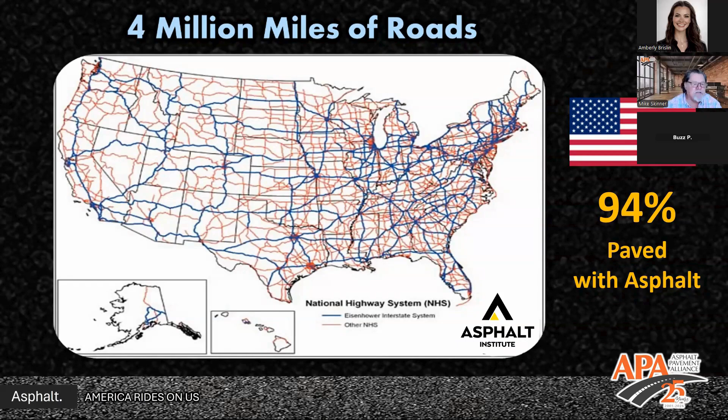Let's take a look at a little bit of history as it relates to our market share as far as the material side. Using data shared with us from the Asphalt Institute, in 2001 there were 150 operable refineries across the United States - 48 of those 150 produced asphalt. Fast forward two decades to 2024, and that number has dropped to 132 refineries, where only 43 of them are now producing asphalt. So we've seen a drop of about 12% in the actual supply side ability, but production has actually increased because of changes in refining technology.

So even though the number of refineries has decreased, production and output has increased. How much has it increased? We look at their next slide with where they track it. This is not asphalt tonnage - this was asphalt liquid binder tonnage.

If we just focus on the green line, which is the liquid asphalt used in paving, you can see the heyday over the last two decades was in the early 2000s, over 30 million tons of liquid binder, then a decrease in 2008 with the recession. The low point was in 2011, where the industry was down to just 14.6 million tons of liquid binder. And then we've seen a slow, steady increase to where we are today. In the last number reported in 2024, a year and a half ago, we are knocking on the door at just about 21 million tons of liquid binder, which is another metric we can use to measure market share, the growth and sustainability of our industry.

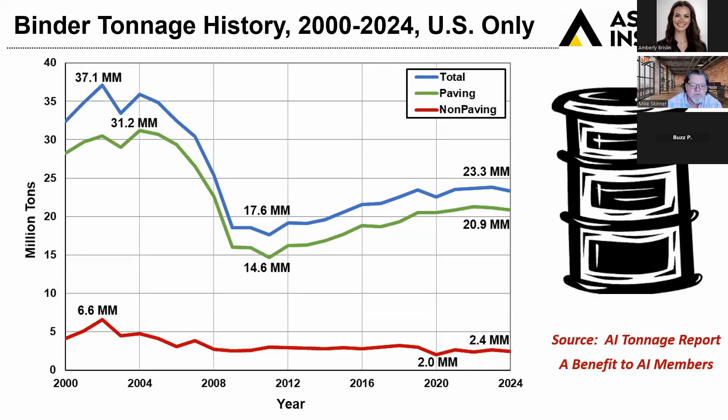We can put it down into a couple of different buckets, a couple of streamlined answers. But initial cost of construction is one of the key reasons why our industry dominates road construction. I'll give some examples about that in a minute.

The new emphasis our industry is putting on streamlining specifications and making them without sacrificing quality, more user-friendly and more flexible for producers—this is in the realm of balanced mix design. We'll talk about that in a few minutes.

Materials innovation, this is a big one. We'll spend the back half of the presentation talking about new technologies that can help solve some of the problems I'm going to highlight here in a few minutes.

And then the concrete maintenance performance has been well documented and researched. Out of the National Center for Asphalt Technology in Auburn, Alabama, they have documented the inflection point occurs at about year 25, meaning the ROI on maintenance, where it used to be promoted at about 40 years, is actually about 25 years based on the data published by NCAT.

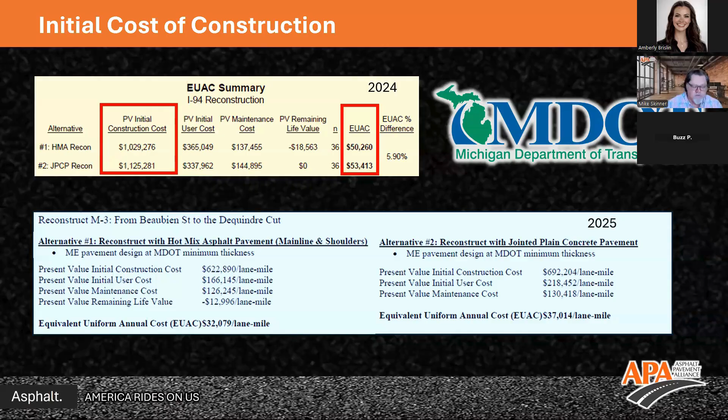Here are two examples from Michigan, where they do a lot of life cycle cost analysis for their projects. Looking at the I-94 reconstruction project, they pull those future costs back to present day value. The numbers aren't terribly important - I just want you to look at the difference between the asphalt reconstruction option and the concrete reconstruction option: a lower initial cost of construction. The EUAC, or equivalent uniform annual cost, also reflects this lower cost of construction.

Take a look at a second project in Michigan. Alternative one was to reconstruct with asphalt, alternative two, reconstruct with concrete. Again, the numbers aren't terribly important, just look at the difference. This project's costs were broken down per lane mile, and it was about $623,000 per lane mile for the asphalt option versus almost $693,000 initial cost of construction for the concrete option.

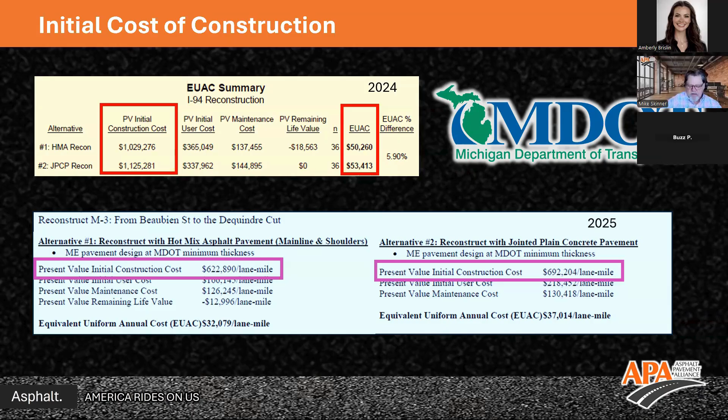When you look at this across the United States, regardless of what local agency - city, county, municipality, Department of Transportation - you'll find this trend across the country that the asphalt option is almost always a lower initial cost of construction. So that's helpful. But the funding and budget that becomes available is really what's driving the success or lack of success of these programs. And I love this quote from Nye.

He is the regional materials engineer for the North Central Division for the Arizona Department of Transportation. Nye is based in Flagstaff, up at 8,000 feet. I was talking to him last year, and he said, 'Mike, listen, in Arizona at the Department of Transportation, we're not in pavement preservation mode, we're in pavement life support mode.' Those of you in the Arizona market probably would agree with that - the roads in Arizona are rough, and there's a lot of reasons for that, but we won't get into it. The concept can apply probably to the state that you're in.

It's not in preservation - and I don't mean preservation in terms of surface treatments, those type of things. I mean preservation in general, maintaining your network. It's in life support. Why are things so bad across the country?

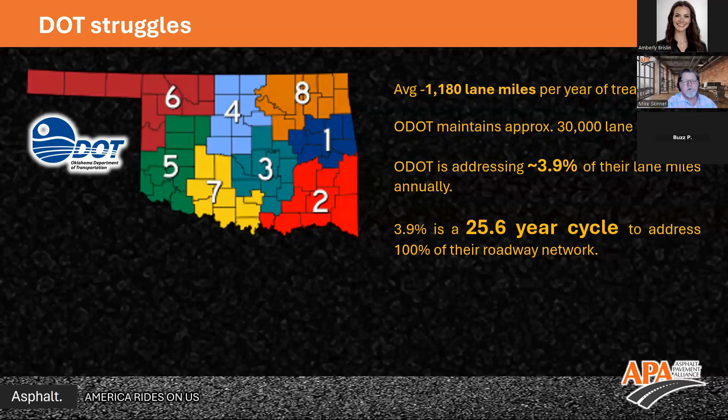I'll give you a couple of examples. Here's an example in Oklahoma, where they have 8 different districts for the DOT across the state, and they maintain about 30,000 lane miles. But based on their current funding level, they're only treating about 1,200 lane miles per year out of those 30,000 - not even hitting about 4% of their network each year. So to cycle through their entire network and hit 100% of the road, it's a 26-year cycle.

This is a perfect example where their only viable path for their DOT moving forward, with the limited budget they currently have, is to minimize their costs and maximize their return on investment - their service level, their quality, and the performance of what they are doing and spending money on.

Now, Oklahoma is not the only DOT in this condition - we could point to examples for all 50 states. I'm just going to draw attention to a couple more. This happens to be Indiana.

Program delivery might be defined in number of tons of asphalt placed every year, or a number of lane miles addressed, or an area or square feet of preservation treatments placed. But all of those numbers come down with minimal or stagnant flat funding.

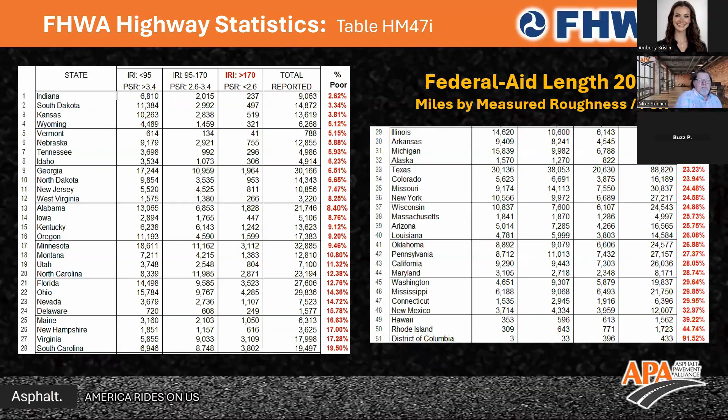What else is impacting program delivery? If you look at program distribution - this data comes from Pennsylvania - going back just a couple of years, to 2022, the percentage of their funding spent on highways was 73%. By 2026, depending on whether you include a bridge project or not, you're down to 45 or 60%. The numbers we're seeing in the other direction are increasing for bridges. This is something we're seeing across the country.

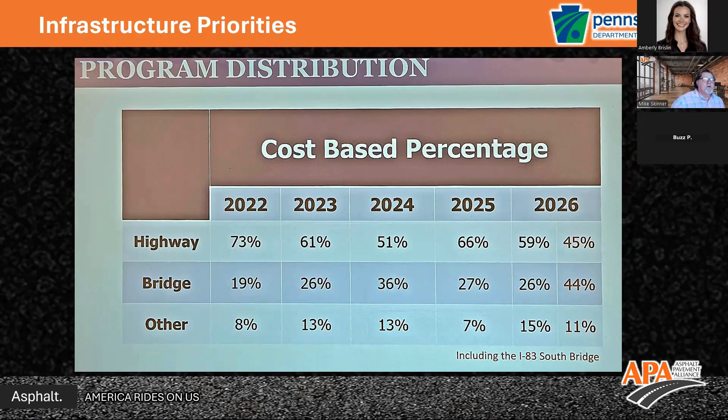Why is it? Well, our interstate highway system is celebrating its 70th anniversary this year. That also means we have an aging infrastructure, and our bridges are experiencing 70 years worth of use. So we're seeing larger and larger infrastructure programs having to include these massive bridge programs, which is redirecting a portion of funds from highways to bridges. We also saw that distribution with the IIJA money that came out a couple of years ago. So program distribution is having a significant impact on highway dollars in your state.

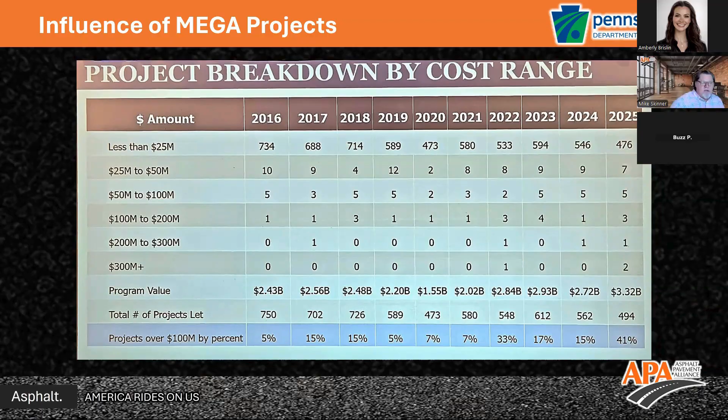While we're still spending money on the highways, it's pulling funds away from distributing them across the state, focusing them in large scale projects, which is having an impact on overall performance across the states.

So I've spent the last 15 minutes talking about impacts to program delivery and problems. It's great to get an understanding of why some of these things are happening, but I don't want to leave it there. So for the next 20 minutes, I'm going to talk about some solutions that we're seeing across the country. Different states are adopting these different solutions, but how do we move forward?

Innovation isn't down the road, it starts today. So I'm going to go back to my statement: progress, not perfection. So what I might be sharing with you today, hopefully there's a takeaway, one, two, or three things here that you can take back as a designer or an agency and say, you know what, I heard some great stuff. Let's move down this road.

Progress, not perfection. So let's talk about expanding the use of RAP, or recycled asphalt. This is Duval Asphalt down in Jacksonville, Florida, and they serve the northern Florida market. Beautiful photograph there, beautiful plant that they have down there. But what I want to draw your attention to is their use of RAP.

Now, RAP varies across the country — RAP usage, RAP availability, RAP quality. So there's a lot that goes into this. This is not a silver bullet, but there's a lot of testing that's required to make sure we're not impacting quality, maintaining quality.

But what I do want to draw your attention to here is their standard mix designs are running 40% RAP there in the Jacksonville market. And then what they identify as their high RAP mixes are 65% RAP. Now, when we start to talk RAP at those numbers, those are some very specialized mix designs, and they require quite a bit of attention to quality and control.

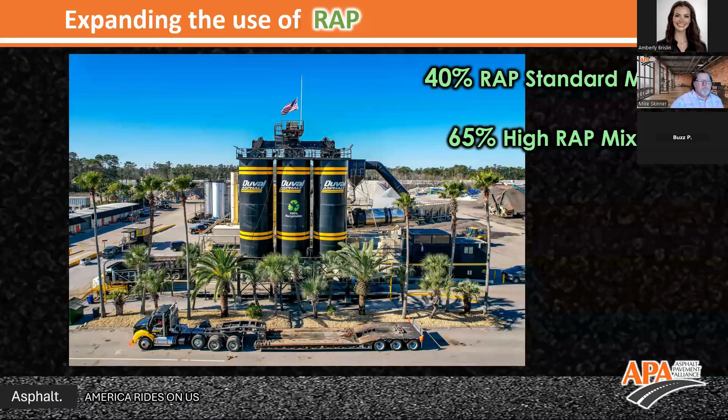Materials and design innovation — I mentioned high mod, or highly modified asphalt. This isn't a material, this is a design philosophy that increases the amount of liquid binder that you're putting in the mix, the quality of the binder and the amount of the binder, and then thick lift paving.

So we can do a whole presentation on this, and Buzz will be doing a presentation on this during our next webinar that Amberly briefly mentioned. But I wanted to give you a two-slide snapshot of what that looks like.

So here are four standard binders that have been in use across Utah at their DOT. The high mod is the one that's on the far right, the PG 76 minus 34. And so Howard Anderson, who's the state materials engineer there in Utah, did a quick little calculation and calculated a stack of 11 dimes is the equivalent of about 1 kilopascal.

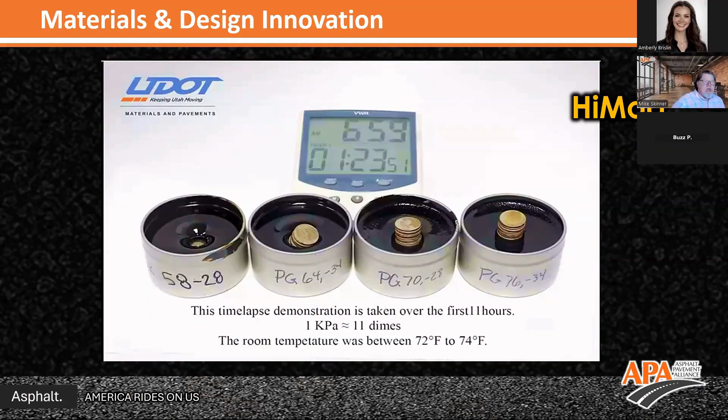So they set the stack of 11 dimes on the surface of the binder and set a stopwatch, and then let it run to see what the stiffness looks like. So this is a great visual of what that stiffness looks like.

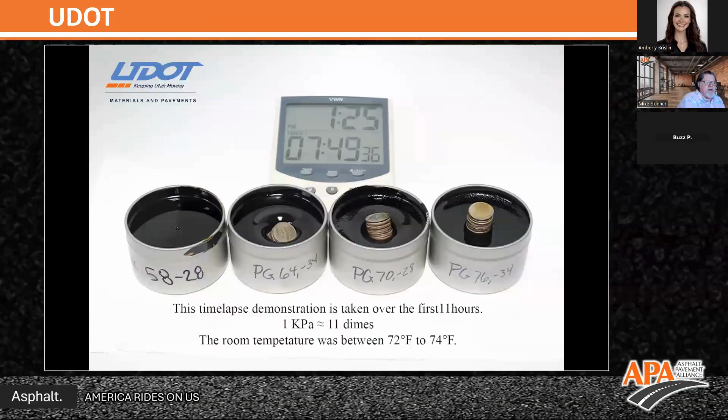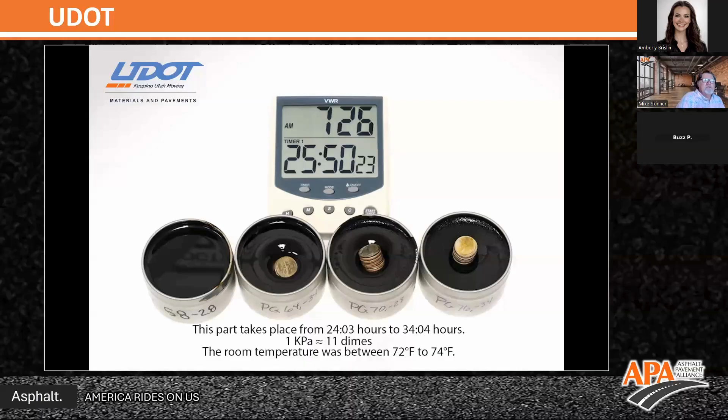Now the camera here is accelerated because you can see the time running through that. But the 58-28, which is the softer binder — we always know that is the softer, more flexible binder — the dimes have completely disappeared. And then the high mod, here we are a day later, 24 hours later, high mod binder, the 76 minus 34 that's used in that material, is showing the stiffness. What's going on here is that binder has a higher percentage of polymer than a traditional polymer mix. That's the easiest way to think about this. And those polymers, because it's at a higher level, really start to dictate the performance of the liquid binder.

The other test that shows the success of these high mod binders is the elastic recovery and tensile strength test.

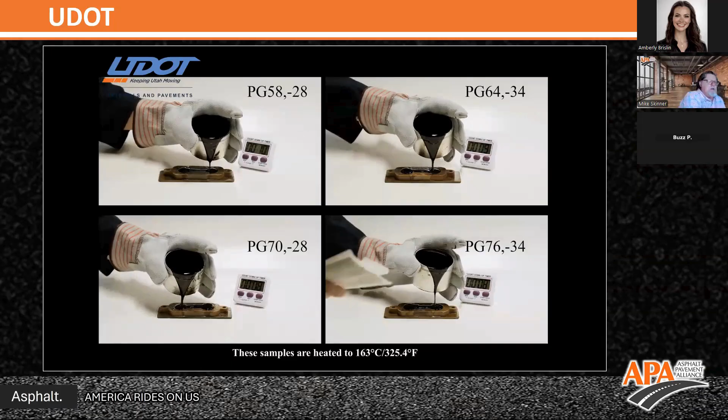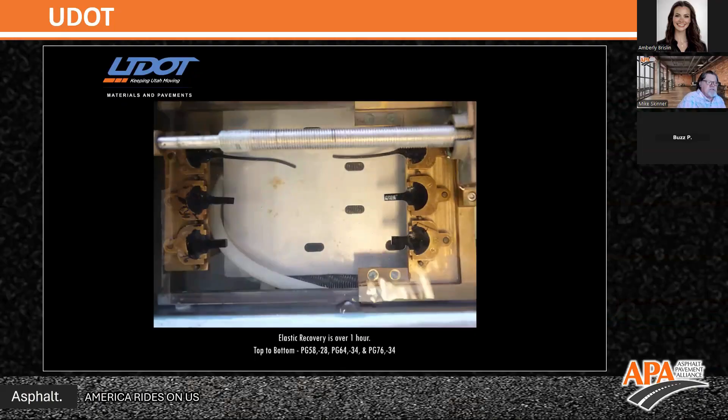Here's elastic recovery. We take this binder, pour it in the mold, put it in a water bath, and warm the samples up. This is a sped-up photograph movie, but we slowly pull them, then cut them with a pair of scissors, and measure that elastic recovery - how much does it snap back? That top sample is the 58 minus 28, and you can see it didn't pull back as much as the modified binders, meaning they have more flexibility.

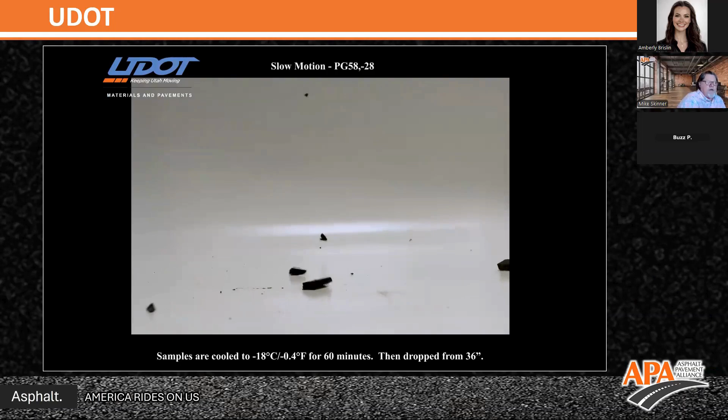The last test Howard did was take the samples, freeze them, and drop them from a height of about 3 feet to measure their flexibility. Interestingly, the 58 minus 28, being the softest binder, shattered - that was the first one. Here's the last sample, the 76 minus 34, dropped and slowed down in slow-mo - you can actually see it flex, and it doesn't shatter.

That's the concept of the material, the liquid binder they're using in Utah for their high mod projects.

They're also paving in thick lifts, contrary to what we've seen for a long time in the history of your career - paving in 6 to 8 inch lifts, but doing it in one pass. Your concern would be, are they able to achieve density compaction in that? Yes, because of the volume of binder in the mixes, typically 6% and higher as opposed to 5%, so they're putting about 20% more mix or liquid in there. They're using a higher quality binder and getting incredible performance for elastic recovery and compaction.

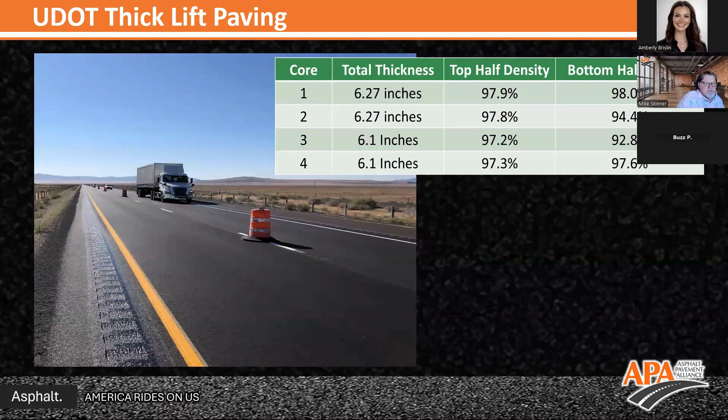So here is their Roads of Tomorrow - this is the cover of the magazine they published in Utah, talking about the implementation of high mod in Utah.

Their target density is 96%, and they've met that in 45 of the 50 projects they've done. Their pavements with high mod are more rut resistant than our previous Superpave mixes. The high mod binder allows higher binder contents by about 20%, and RAP is allowed in the surface course of these high mod mixes.

They're using regular dense graded aggregates, not gap graded aggregates like would be required in an OGFC or an SMA. That helps control costs when you don't have to do as much crushing and stockpile management with gap graded mixes.

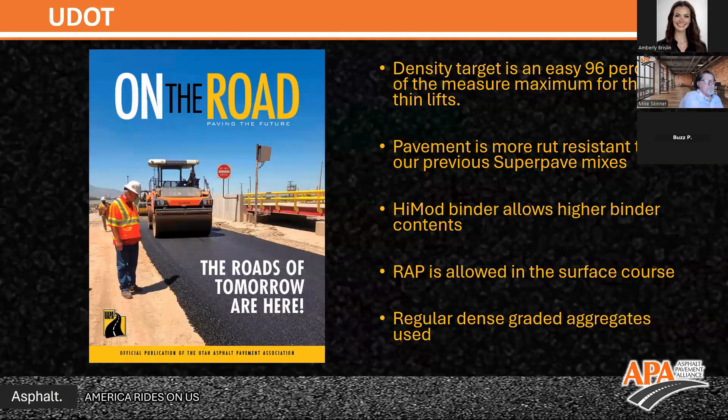Moving on to some other tools and resources that are available for you in the industry right now.

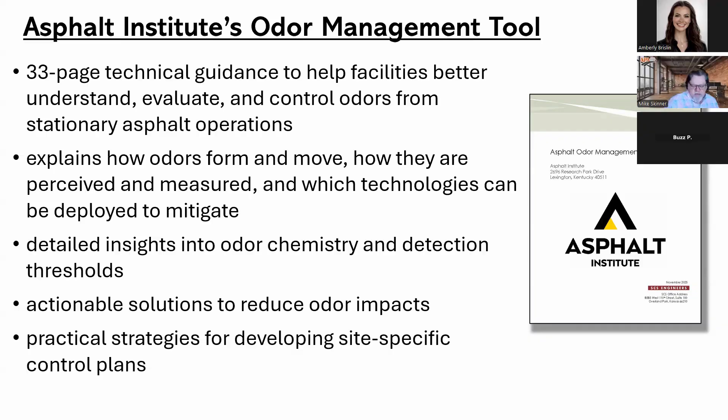The Asphalt Institute has recently issued their odor management tool - a 33-page technical document you can download off their website right now. It explains how odors are formed, how they're perceived, how they're measured, gives details and insights into the chemistry, detection thresholds, and actionable solutions to reduce odor impacts. If you're on the production or industry side, this is a wonderful tool. They've also got pre-recorded webinars, a three-part webinar program specifically about this odor management tool. It's an excellent resource if you're looking for impacts on odor management.

Another excellent resource I'd draw your attention to comes from NCAT, the National Center for Asphalt Technology, and some of their research as it relates to pavement design. Pavement design structural coefficients - the strength parameter assigned to the mixes as a variable - has the single greatest impact of all design variables.

So what we're looking at here is the initial construction of the test track in 2000. It was 24 inches of hot mix - a sea of asphalt, because this was the very first iteration. It was built to be perpetual, so they could control the distresses they wanted to control without other impacts. We've since learned that 24 inches far exceeds what's needed, and that perpetual number is much less, depending on where you are in the country and what kind of materials you have.

I'd draw your attention to NCAT if you're doing design work in engineering, to make sure you're using and have justification for using these higher structural coefficients. It's well documented - the Alabama Department of Transportation has been using a recalibrated structural coefficient since 2009. Dr. David Timm, one of the lead investigators and authors of this report, puts it well: Alabama has moved past the risk window. They've been using these structural coefficients since 2009 - if it was going to fail, research would have shown it, but it didn't. If it was going to fail, it would have happened already. I love that concept - they've already moved past the risk window.

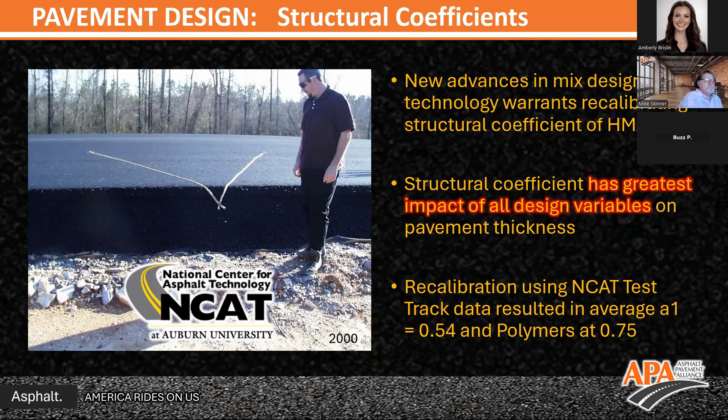As we wrap up our presentation, I'll share a couple of examples of sustainability.

Some of you across the country and states, this is very important to you, and it's a key component of your industry right now. Other states are not in that sector as far as environmental product declarations, and I'll talk about that in a minute.

But allowing alternatives to hydrated lime can make a significant impact on your environmental sustainability footprint. Hydrated lime is added to a mix as an anti-strip additive to keep the liquid binder adhering to the aggregate. But there are other alternatives in the form of liquid anti-strip or chemicals that can be added at the plant during production. Some states still do not allow liquid anti-strip, which can also have additional properties as compactive aids, warm mix additives, etc. They can serve a lot of purposes.

So we're not suggesting that you abandon hydrated lime, but maybe it's an 'and' application, not an 'or.' If you're not allowing for the application of liquid anti-strip, that's something you might consider.

Environmental product declarations: the National Asphalt Pavement Association is leading the way with their development of the Emerald Eco Label tool. You can see highlighted some of the states that are well along that route, that have implemented low carbon transportation standards or environmental product declarations. We don't see it across the country, but there are some key markets moving forward. Colorado is one of them, where I happen to live right now.

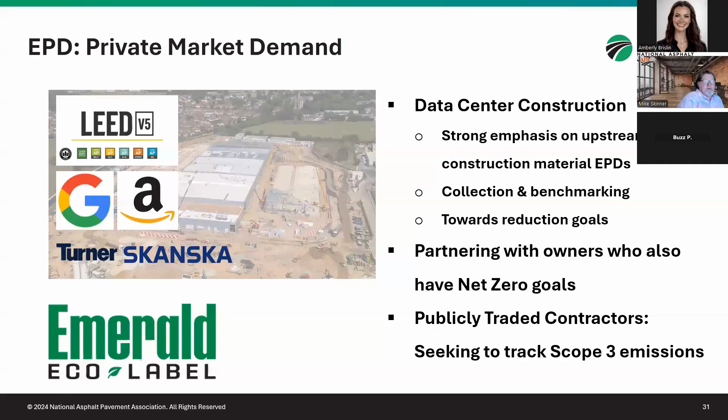Now, if you're in one of those states that doesn't have environmental product declarations, you might say this doesn't apply to us. I'd say be careful, because in the commercial market we're also seeing this, and NAPA's doing a great job engaging with industry on the commercial and private market. We're seeing large companies like Amazon and Google, and large civil construction companies like Turner and Skanska, building data centers across the country that have requirements for environmental product declarations as part of their bidding and procurement. So even though your DOT may not require it, if you're doing work in the private sector, be aware this is a growing segment.

What is an environmental product declaration, for those of you that might need a 10-second refresher? By definition, it reports the equivalent amount in kilograms of CO2 created to produce one ton of asphalt. That's all it is - how much CO2 equivalent is created to make, not place, but make one ton of asphalt.

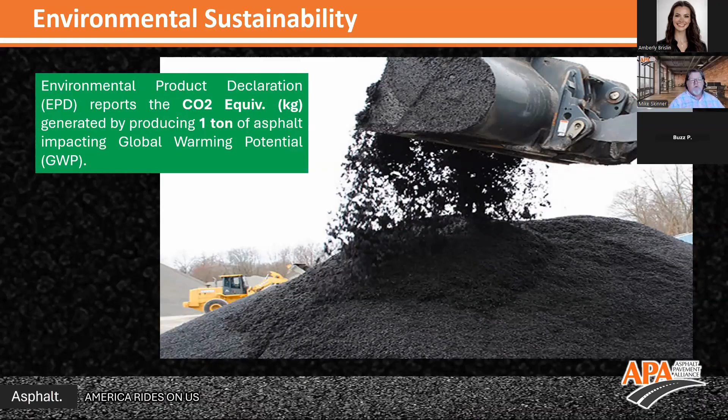A simpler way to think about that: take the term 'equivalent kilograms of CO2' out, and substitute the word 'energy' instead. It's an easier way to think about this - how much energy does it take to make one ton of asphalt? Okay, I can get my head around that. I understand what we're talking about.

So when we talk about the pavement life cycle, EPDs right now are only focusing on quadrants A1, A2, A3: the materials themselves, transport, and production. Materials - how much energy does it take at the quarry to extract the aggregate out of the ground with a trackhoe? How much energy does it take to run it through the crusher? How much energy does it take to put it in a stockpile and manage those stockpiles?

That's the material side. How much energy does it take to transport those materials? If you're lucky enough that your plant is actually located at the quarry, you're going to have lower transportation energy costs because your stockpiles are right there. But your quarry might be 10 miles down the road, and so you have an energy cost. Are you going to rail it from out of state? Put it on a barge and send it down the eastern seaboard? Or just put it in a truck and drive it 5 miles to your plant? Those are energy costs associated with that.

Then once you get all of those materials to the plant, how much energy does it cost to run your plant? Is it a newer, more energy efficient plant, or is it an old plant? Is it using waste oil? Is it using natural gas? What's the heat source to dry the aggregates?

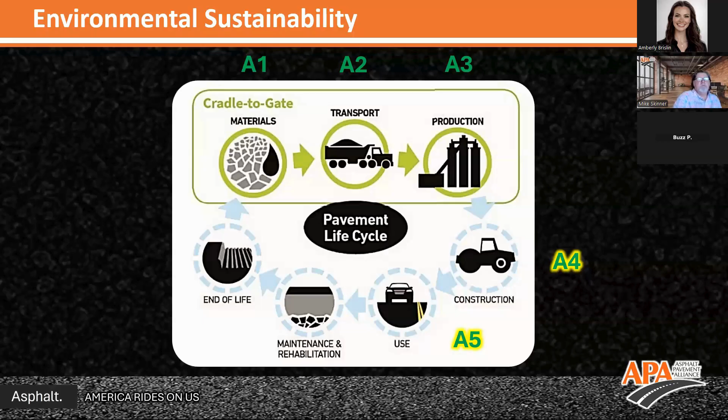So this is the concept of what an environmental product declaration is. What impacts an environmental product declaration?

If you look at a sensitivity analysis, the number one largest impact to an environmental EPD is the percentage of virgin binder that is used in the mix.

Number two sensitivity impact is the plant, the heat source that's at the plant. Number three is your transport, which is very subjective based on your locale, where you are in the United States, and the plant. But number one and number two are how much virgin binder you're using in the mix, and what kind of heat source you're using at the plant to dry the aggregates when making your mixes.

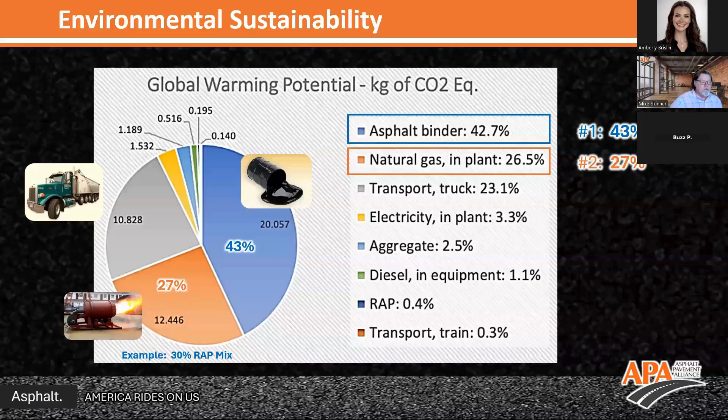Is this going to change or have the ability to change your paving train? Are you going to be able to remove one of your rollers? Do you just have a rubber tire roller and a finish roller? Do you need the breakdown roller? Well, that's up to the contractor to see what they do. But there's an impact here with changes in construction and technology.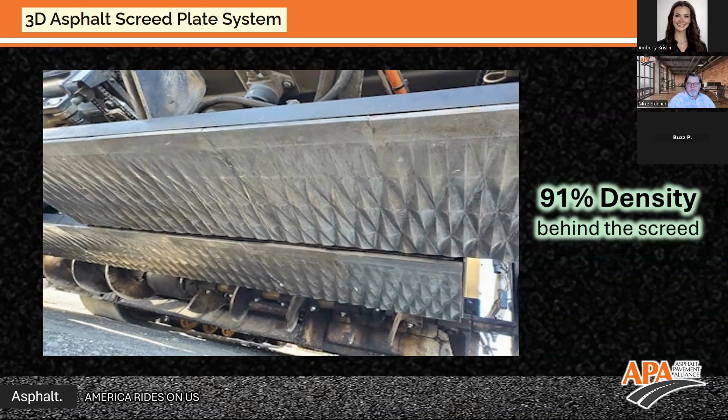So we're going to wrap this up, as I've pointed out some problems, some funding challenges, impacts to program delivery, some solutions that we can look at to address some of those program delivery issues in terms of additives, high mod mixes, etc. What's the gatekeeper? What's holding industry back from moving forward with some of these things?

DOTs are risk-managed organizations. They're publicly accountable, and that drives their conservative decision making. I've heard them talk about this before - trust is their currency. That's all they have, their trust back to their governors and their state legislatures. That's it. So they're conservative by nature to maintain that trust. It's difficult to move the needle and change this pace of progress with that.

Another challenge with the DOTs on slow innovation is the long project life cycles and multi-year budgets make innovation challenging. It's hard to have one-and-done to get performance over a long-term range.